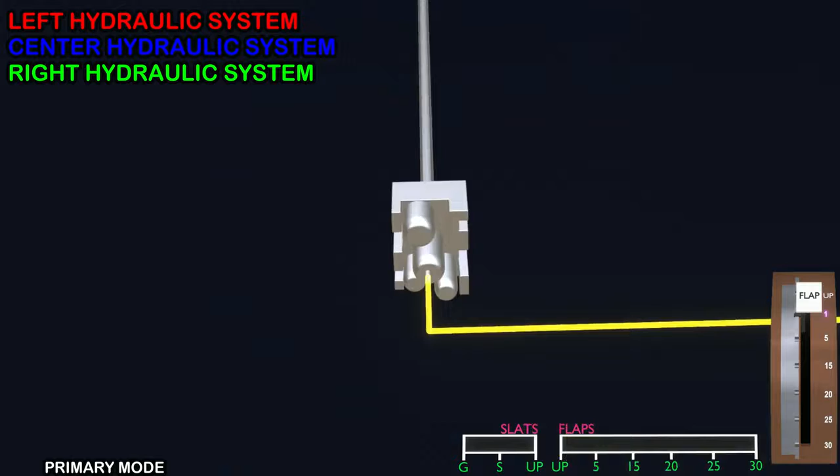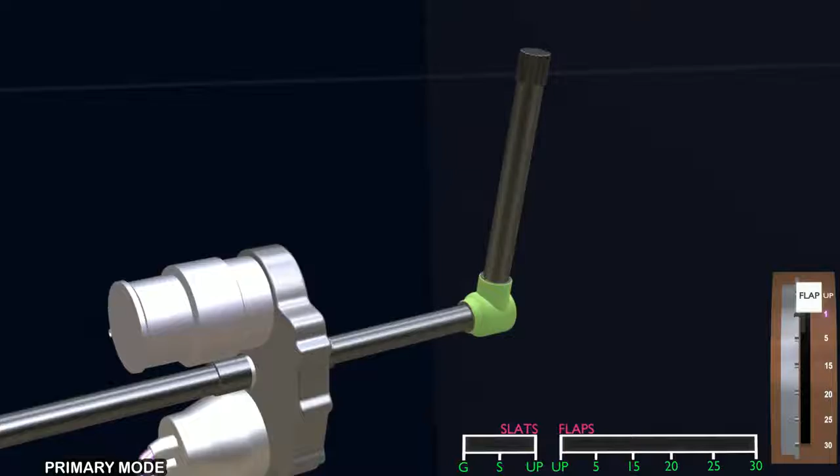Then it sends a signal to the slat hydraulic valve. The center hydraulic system of the aircraft is used to operate the slats. The valve opens to run the hydraulic motor. The motor drives the slat power drive unit gearbox. Connected to the gearbox are the torque tubes. Angle gearboxes help route the torque tubes to the right wing.

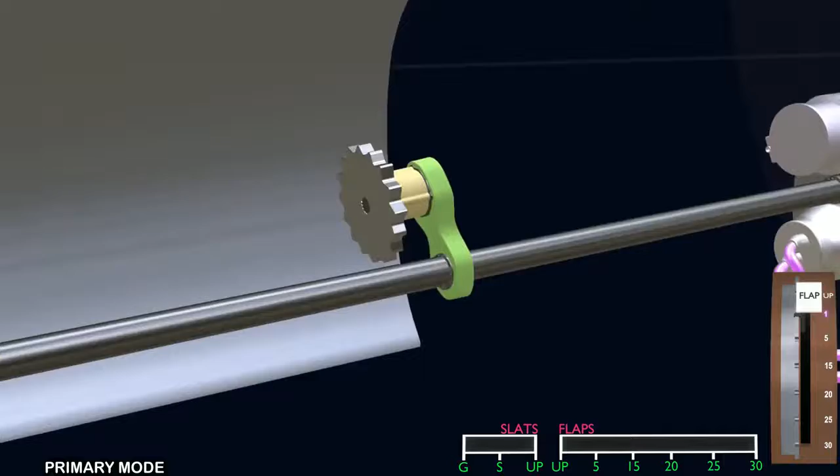Now let's see how the torque tube rotation results in slat extension. The offset gearbox uses the torque tube rotation to drive a rotary actuator. The actuator rotates the slat pinion gear. There are 2 gear connections for each slat. The gears extend the slat to the sealed position with the help of tracks.

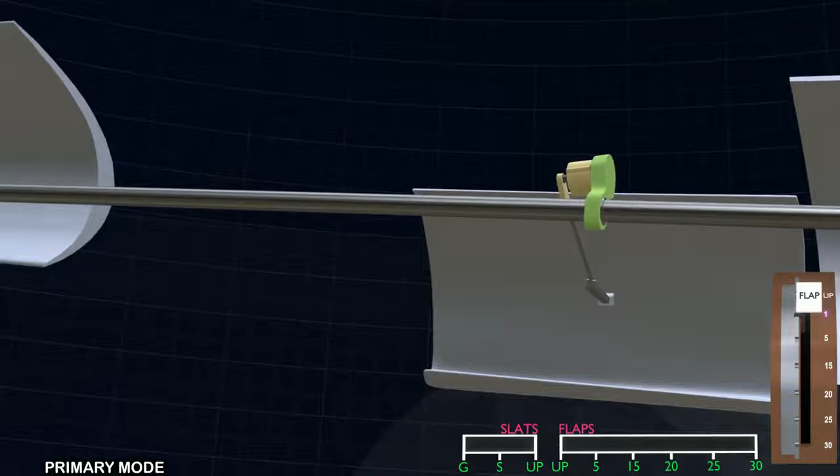The Krueger flap has 2 positions, retracted or fully extended, and instead of gears and tracks, uses a pushrod connection. Just like the inboard slats, the outboard slats extend with the help of gears and tracks.

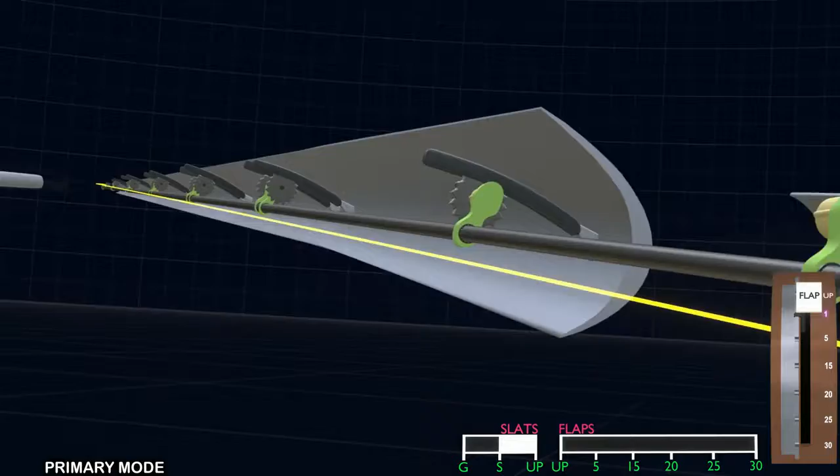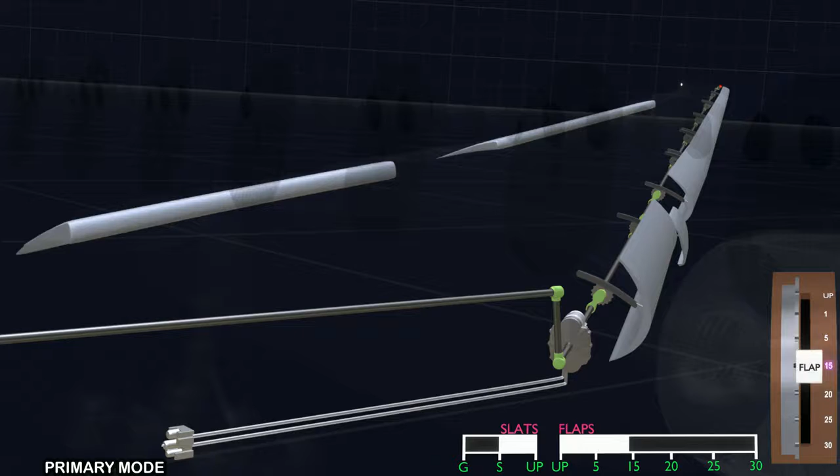Position sensors on the offset gearbox measure the torque tube rotation and send the signal to the flap slat computer. This allows the computer to determine the slat position and control them with precision. Flap lever position 5, 15, and 20 controls the trailing edge flaps. The slats remain in the sealed position.

Changing the lever position from 20 to 25 results in both flap and slat movement, but they will not extend simultaneously. The computer will follow a sequence. First, it will command the slat power drive unit and move the slats to the gapped position. After the slats extend, the flaps are moved to 25.

Flaps 30 will move the trailing edge flap to its maximum extension. Now let's look at the retraction sequence. First, the flaps retract to 20. Next, the slats are commanded to the sealed position.

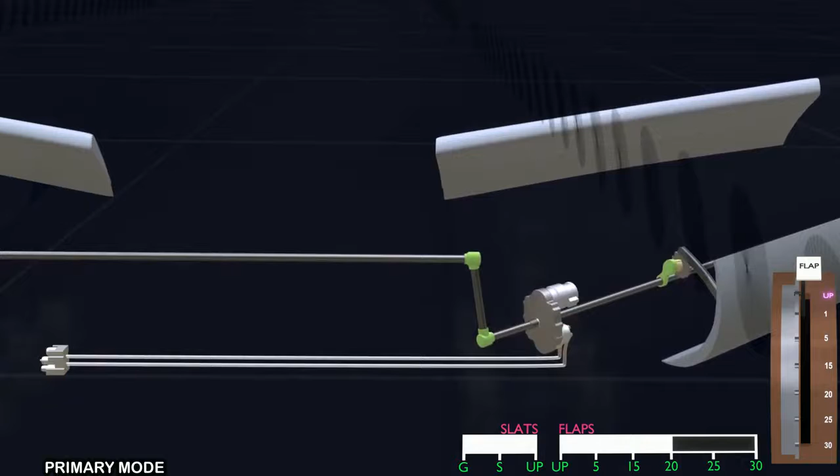If the hydraulic components fail during a slat command, the computer will automatically switch to the secondary mode. In secondary mode, a signal is sent to the electric motor to operate the power drive unit. The torque tubes are driven in the opposite direction, and the slats retract to the sealed position. Next in the sequence, the computer retracts the flaps up. Finally, the slats are moved to the retracted position.

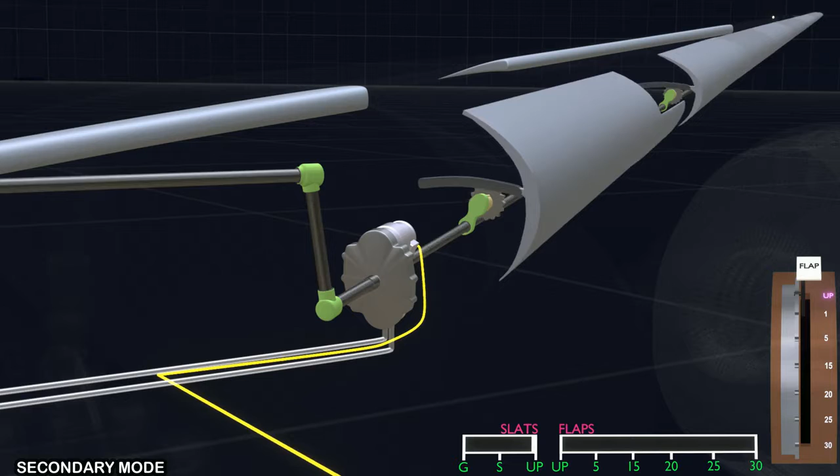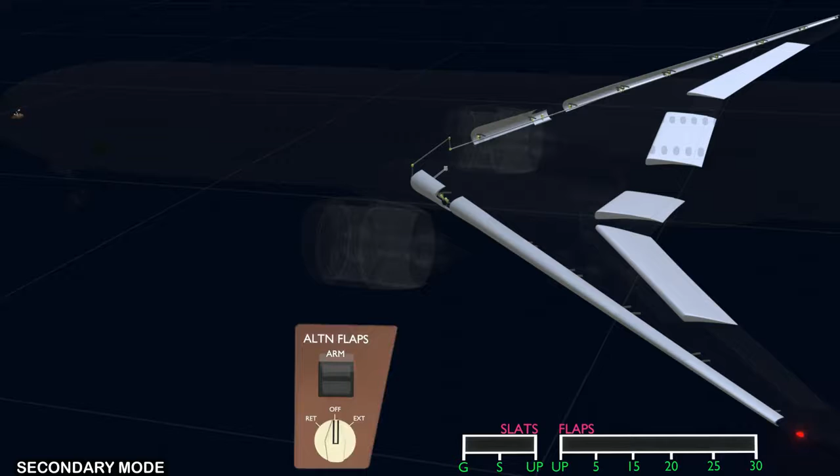If the computer malfunctions, the flaps and slats can be controlled using the alternate mode. Arming the system will disengage the current mode and prevent the computer from controlling the flaps and slats. Let's extend the slats in alternate mode. The switch directly sends a signal to the electric motor to run. Since the computer has been bypassed, there will be no sequencing. The slats and flaps will extend simultaneously. In alternate mode, the slats can only be extended to the sealed position, and flaps to maximum 20.

As we have covered all the flight control surfaces, in our next part of the series, we will understand their function in flight. Thanks for watching.